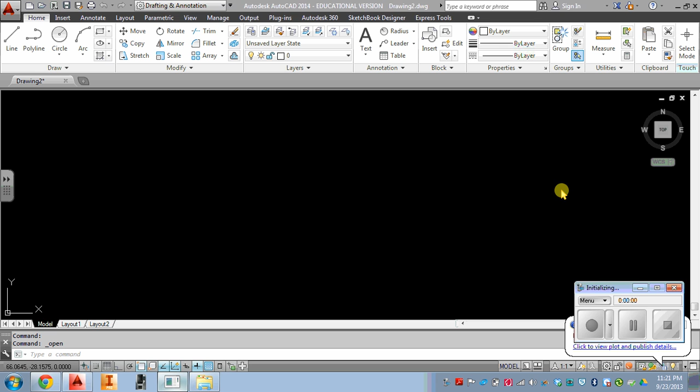Okay, so for this one, we got this bearing drawing we gotta draw. So first thing I would do is just draw the outside circle. So I do D for diameter and 5. I'd repeat the same circle command, do D for the diameter 4. Repeat the command, D3. Repeat the command, D2.

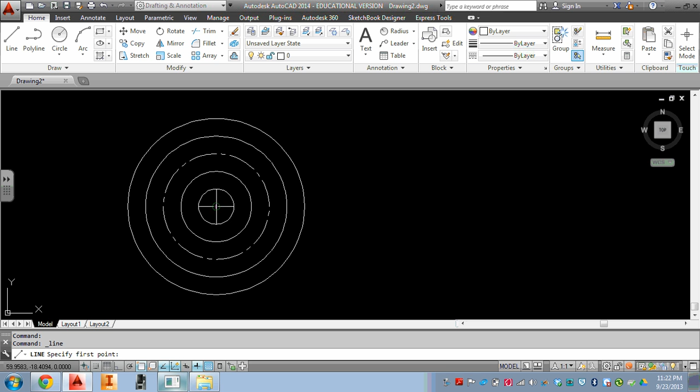And one more, center D1. So you got that. To keep my bearing straight here, I might just pull this down since I loaded center already. I am happy with that. So what I'm going to do is I'll go ahead and draw my center lines. So I'm just drawing it, turn my ortho on. If you can get that projection to show up like that, just draw it across.

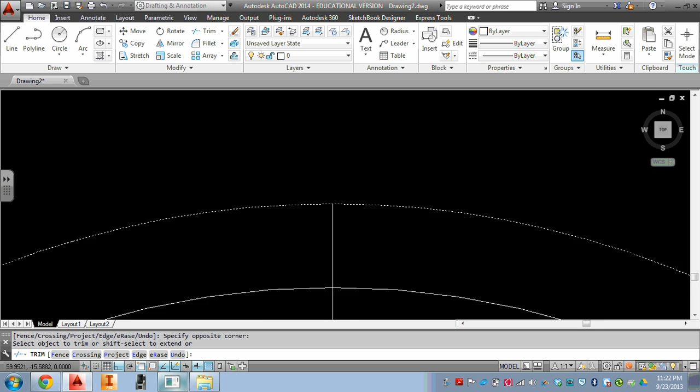I'm going to offset 0.25 just to keep my lines consistent. I'm going to go trim this up there. Okay. So I'm going to erase that, and I'm going to pull this and do a center line as well. So when I do that, I need to put a circle in here. What you can do is I have my quadrant, if you had intersection, either or. I'm going to put that there. So that looks pretty good.

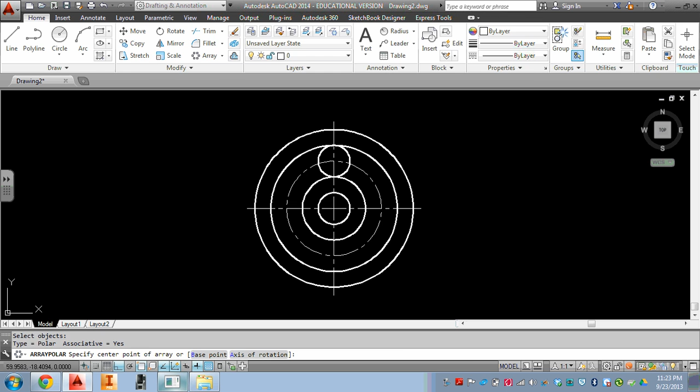I'm going to go ahead and select all my lines because next thing I'm going to do is I'm going to change it to do an array. So when I do an array, I'm going to do a polar, meaning a circular pattern. So select objects. I'm going to select the object I want. I'm going to select the base point right there. Now, that don't give me the quite correct amount. I need 8. So if I come up here and type 8 in, updates, hit enter.

I will say the only reason I did select that was because I don't believe I can come up here and change my line weight at this point. I cannot. So if you haven't done your line weight, you have to do an explode. And now it creates them as individual parts. Explode ignores the previous feature. Problem is, after you explode it, you can't go back and say, well, I want to change it to 6. So just keep that in mind. Awesome tool. Just got to remember that.

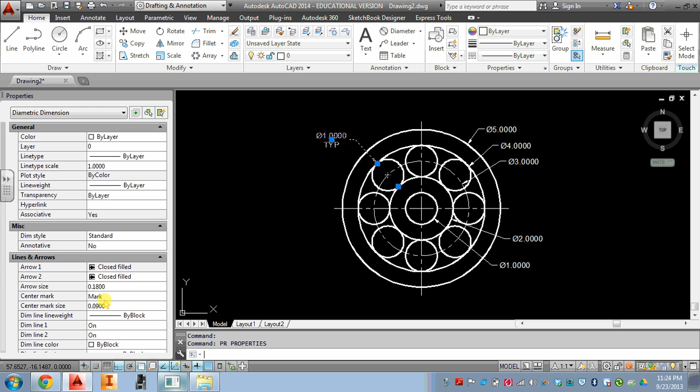So when we go ahead, we'll throw our dimensions in here. Diameter, 5, 4, 3, 2, 1. And we'll just put typical up here. TYP. And I'm going to type PR for properties. Get rid of that center mark, just because I don't want to see it there. I'll close that. And that's it for the bearing drawing.